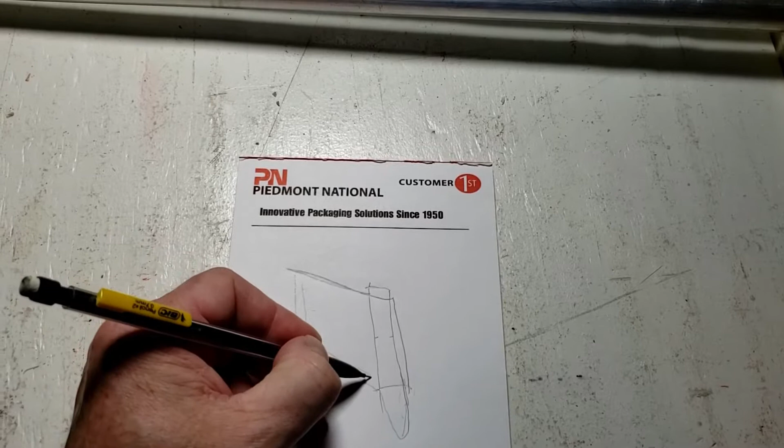Because the way I'll do this is sort of come down, go at an angle, go over this, up, try and stay as close to that angle as possible. And then there'll be a pocket in here that goes like so.

Now, I'm not going to go through and design the entire part here from scratch. I already have an initial design, and I want to step through some of the important aspects of it and then do a test print and test fit and see where we're at. Maybe come back and we'll have to make some changes.

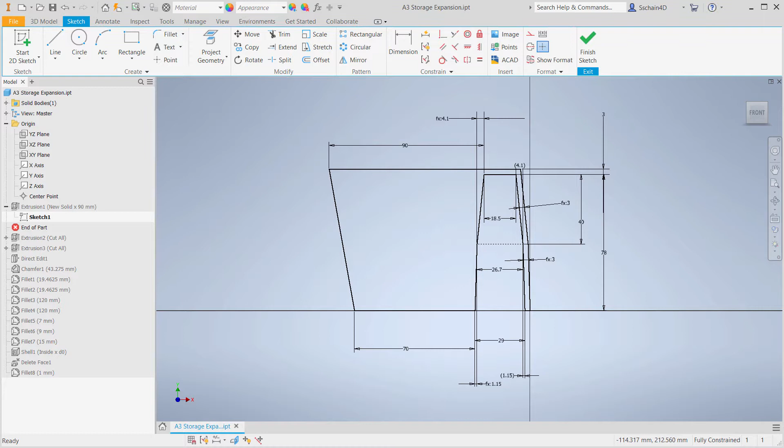What I have here in this sketch is the basic profile. So I have an area where it's going to sit over the lip that's on the side of the center console. Then I have the area over here that's 90 millimeters wide at the top, 70 at the bottom, and that'll be used for storage. So I'll finish this sketch, and that's just extruded out.

And if we look at the amount it's been extruded, just did 90 millimeters, move the end down, and this is going to shape the side. So now keep in mind that the lip on the edge of the console tapers and drops down. So having this on the bottom will give me that taper.

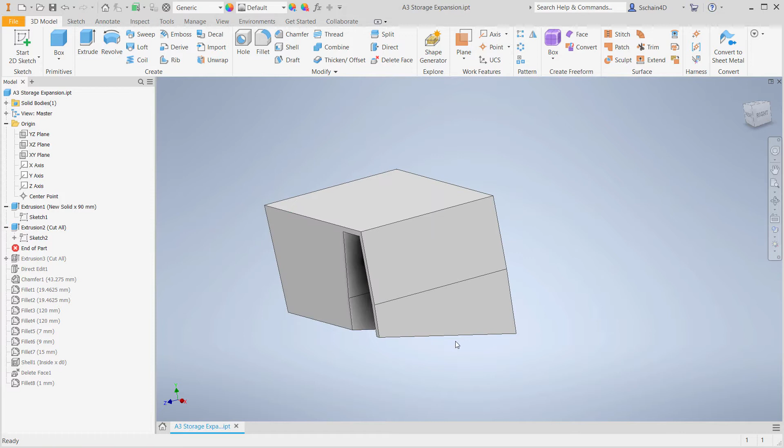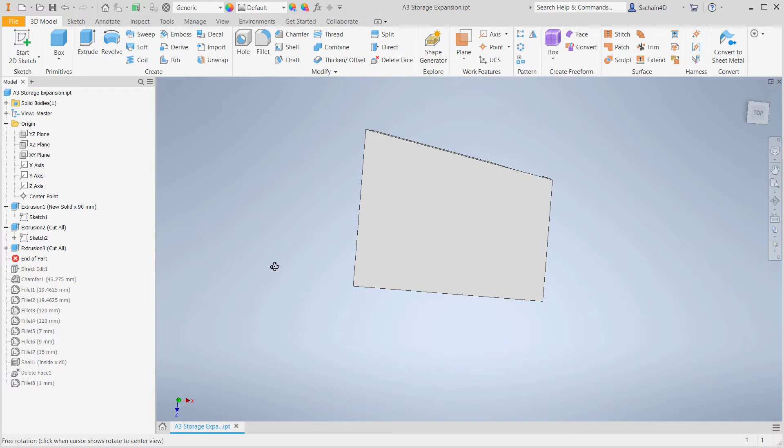And that's just a simple projection, and then cut that and took the measurements based on what I measured in the car. Did the same thing here on the top. So if we look at the top, I did the same thing with that angle. So that's the angle between the center console and the area where the steering wheel is.

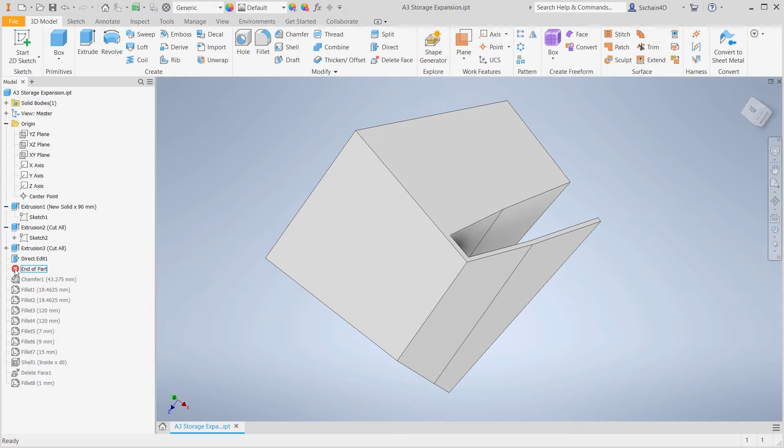Then I did some direct editing, and here I rotated this out to match the angle of that front panel. And that was about 56 degrees. So I just rotated it out. And then really the rest of this is fillets and chamfers. So the first thing I did was chamfer this back because I don't need the whole thing and I want to regain some space. I don't need to have the pocket going all the way down.

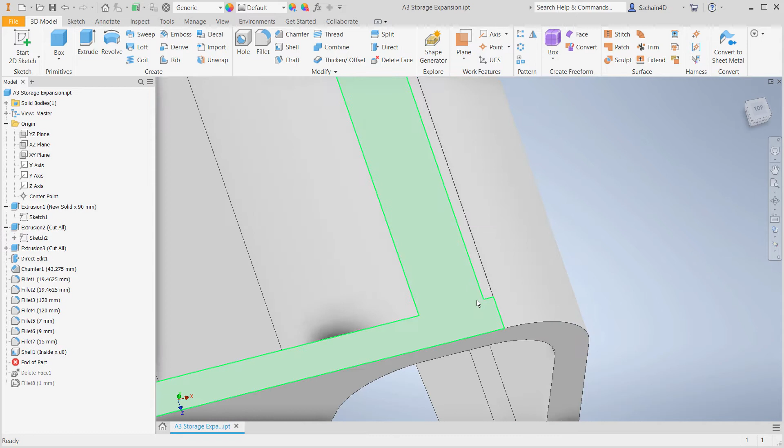Then added quite a few fillets. Then I shelled it and I was left with that little face there. So I just went and simply deleted that and then filleted the edges around the top of that. Then I went ahead and exported this as an STL file and 3D printed it. And unfortunately, the 3D print ran out of filament, but it really doesn't matter. This is just a test print anyway.

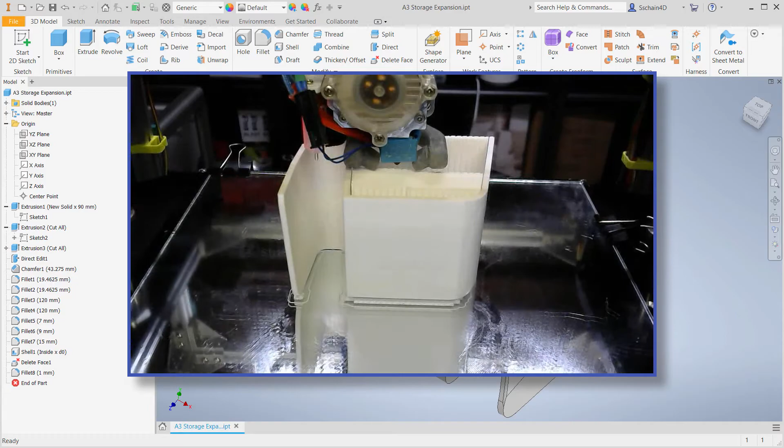All right, so we've got the test piece here, and just going to see if that fits. And it looks like it does, but one thing I noticed now is right there, instead of going out, I need to have that come back. So what I'm going to do is I'm going to trim that off.

All right, so I cut this a little bit just to see if it'll fit, and let's see. So that fits nicely there, slides in, and I think that's going to work with that hanging on. Obviously I don't want a hole in there, but it fits nicely. Let's see if I can put my sunglasses in there, or maybe some hand sanitizer, because that's needed nowadays. Let's see what else I can put in there.

Mask. Yeah, there's my sunglasses. Let's take that out. Put my sunglasses in there. Yeah, I think that might work. And I still have plenty of room. I can even make this a little wider and give it a little bit of a taper and make it a little longer even. And have it come down like that as opposed to just being square. So let's go back to the drawing board and we will update the design.

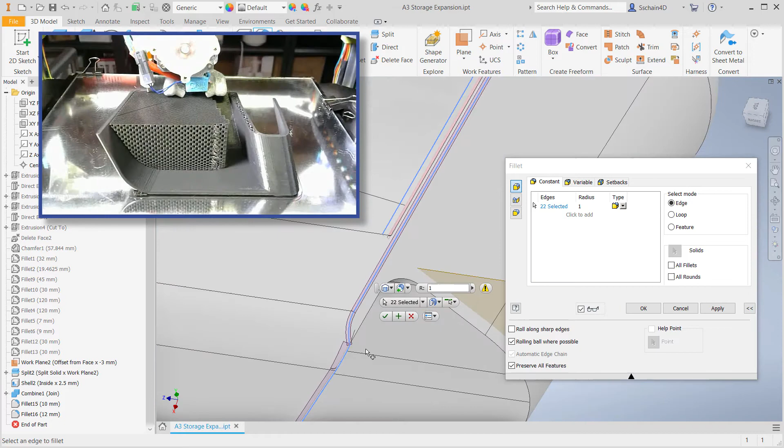All right, so we've got it printed. This angle looks a lot better. It's much bigger, and hopefully it fits, and it's not too big. So let's see, we'll put it in there and slide it up, and hey, look at that, it looks great. Fits nicely. It'll give me some room in there to put some foam to keep it stable. And let's see what I can put in there.

Let's grab my sunglasses. Okay. And I've got some hand sanitizer. Don't want to leave home without that. And I've got my mask. I take that with me wherever I go nowadays. That's pretty good. I like having that. It definitely makes a big difference in the amount of storage space that I have, I think I almost doubled my storage space.

I really like the way this came out. Moving forward, I may make a few minor adjustments to the design, but for now, it will certainly be a useful addition to my car.